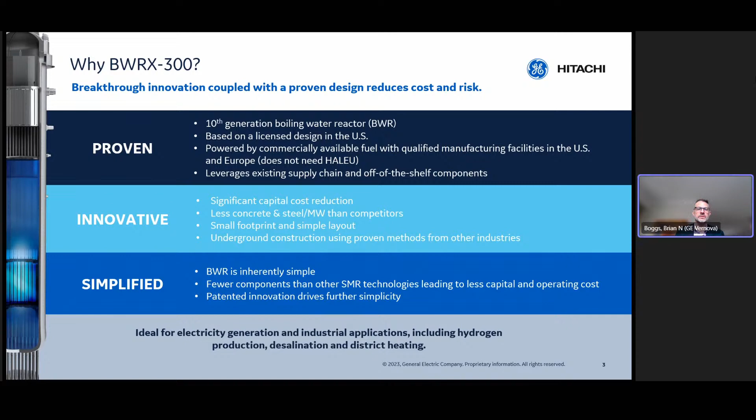Kind of touched on this before, but why GE or why GE-Hitachi? Like I said, we've been at this for quite a while. We've been at this over 60 years in the nuclear space. In fact, we had the first reactor that was commercially owned. That was in Canada.

I'll touch on our activities in Canada in just a second, but I'm sure most people in the audience are aware we're going to be deploying the BWRX-300 in Canada with Ontario Power Generation. So we like to say we're coming full circle with the first reactor happening in Canada back in the 60s, and now we're looking at deploying in the late 2020s our first reactor at the Darlington site.

I'd already mentioned that we have 67 reactors licensed in 10 countries. There's still dozens in operation. I think it's about 23, 24 in the US alone. So when you think about a company that has not only the technology that's evolved over time and is on its 10th generation, you also have a company that has decades of experience servicing reactors.

So I think that puts us in a unique position for a lot of folks that are looking to deploy, where we fully understand how to take a reactor apart, how to refuel the reactor, how to do inspections, how to do a lot of the modifications that may need to happen over time, and then also get the reactor back online as quickly as possible, which is one of the most important things, because the less time you're down, the more you're able to generate steam to produce electricity or some of these downstream products. We also mentioned the bundles of fuel.

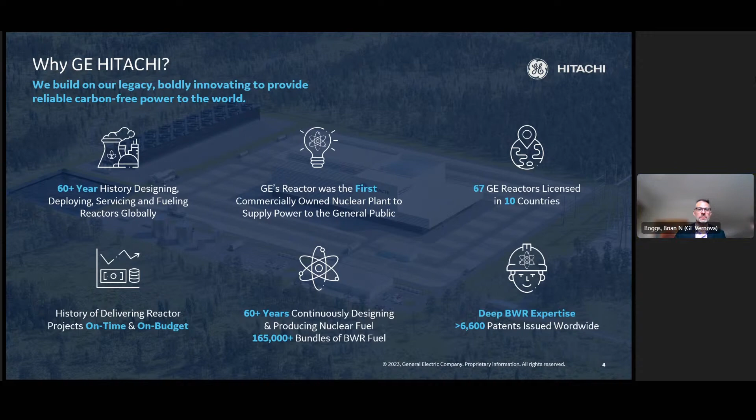So it's pretty exciting. Before the end of this decade, we do expect one, if not more, to be online, operating, generating safe, clean, reliable electricity to the grid in Canada, which should set us up, as well as the industry, very nicely for more SMRs to come online. And as confidence builds, we expect this to scale accordingly.

So as for some of the activities in Canada, OPG's already submitted their construction license application. So we're already actively working with the CNSC in Canada through OPG to get this license approved so that they can move forward with the large scale construction.

Also in Canada, we've been selected by SaskPower. I was actually there yesterday with the SaskPower team. That's one of the reasons I couldn't be with you today. And they're looking at potential deployment in Saskatchewan as well. With a lot of the coal retirements and the aggressive carbon goals that Canada has, they're looking to use the BWRX-300 to meet some of those goals.

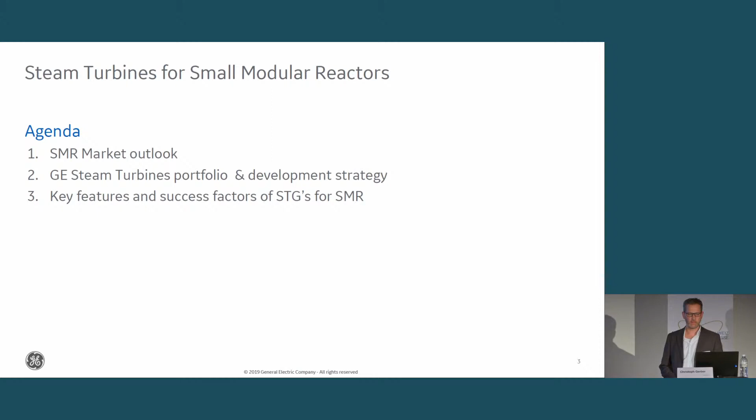And the third element, obviously, is the decarbonization strategy and what that means for the SMR specifically in the short term as part of the SMR strategy 2030-40. We expect that SMRs will replace some of the decommissioned fossil fuels. That's also why the size of the BWRX-300 is chosen in the 300 megawatt range, because a majority of the fossil fuel plants that are decommissioned are in that power output range.

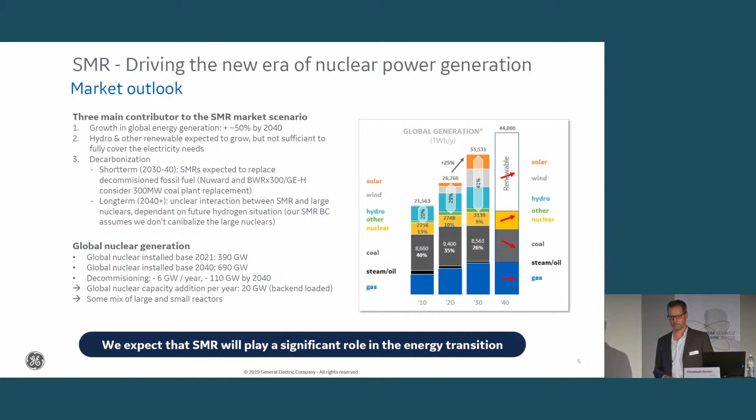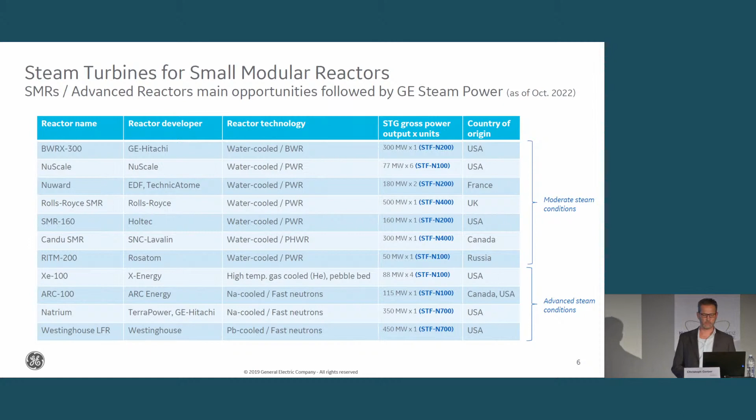So if we look at the N100, the smallest solutions, that's a range for 50 up to 130 megawatt. A typical example is NuScale. I think most of you have heard of these activities. It's a single shaft turbine which provides power output in the order of 70 megawatt. The N200 frame covers a range between 100 and 350 megawatt. It can be configured with 1 LP or 2 LPs, depending on the size and the volume flow in the end that needs to be covered.

An example for the smaller size would be the Nuward opportunity, which is being developed by EDF, and on the bigger end of that range would be the BWRX 300, in the order of 300 plus megawatt power output, which considers 2 LPs at the end of the HP turbine. STF N400, a range between 250 and 500 megawatt. An example here would be the Rolls-Royce solution. And then at the end of the range, for instance, the Westinghouse application, which is the N700 frame, an application for advanced steam conditions, which will come even later than the conventional steam conditioned reactors.

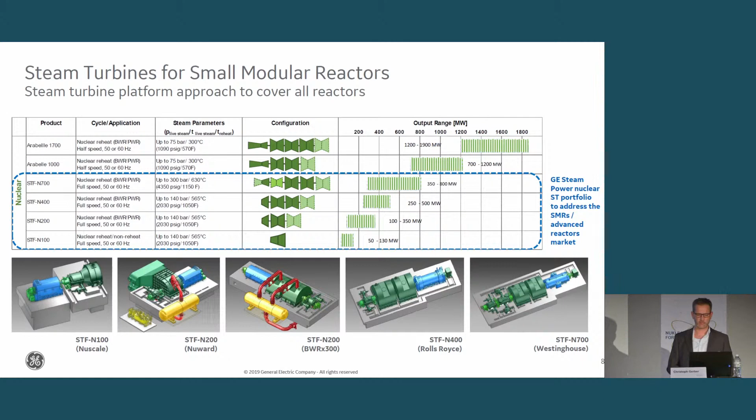Some key factors that we believe are critical for the success of the SMR journey. Cost, obviously, is one of the key elements. We are designing our solution for cost. We are optimizing our turbine and the generator specifically to reduce cost as much as possible, looking at all the aspects, at the design, at the configuration, at the material. At the same time, we also improve performance as much as possible. So we need to find the right balance to drive down cost, but also have a high-performing steam turbine. And because we talk nuclear, obviously we need to make sure that the design is resistant against wetness.

We are also looking at the sourcing and supply chain, again, to reduce costs, but also to improve lead time, which is a key element of the SMRs compared to the large nukes, as we know. And we want to develop a standard product portfolio which again helps to reduce costs and improve lead time, and this standardization should really cover the complete target range between 50 and 500 megawatt.

Modularization, as per the name, we are looking into that, trying to assess how this impacts for our scope lead time and transportation costs. It will improve quality because we have a bigger scope of assembly in-house in our workshops. And it would also give an advantage in the accuracy of the planning, the schedule, and the costing, because of less uncertainty during site erection. And last but not least, we are also trying to optimize our execution process, for minimizing execution time and also execution cost in the end.

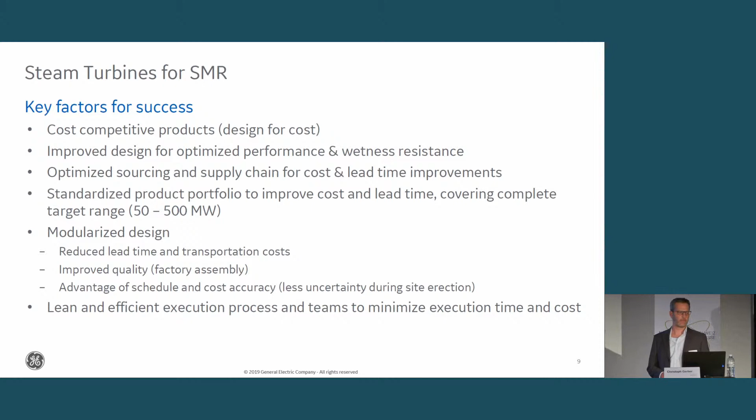And obviously, depending on the site, there will be different cooling conditions, which has an impact on the detailed steam path design. But all this should not change the footprint, the outer shape of our solution. So from outside, you will not see a difference. But we can accommodate those changes by optimizing the steam path, mainly by exchanging, for instance, the rear stages, the last stage blades in the LPs, to have optimized operation and proper coverage of the related back pressure condition.

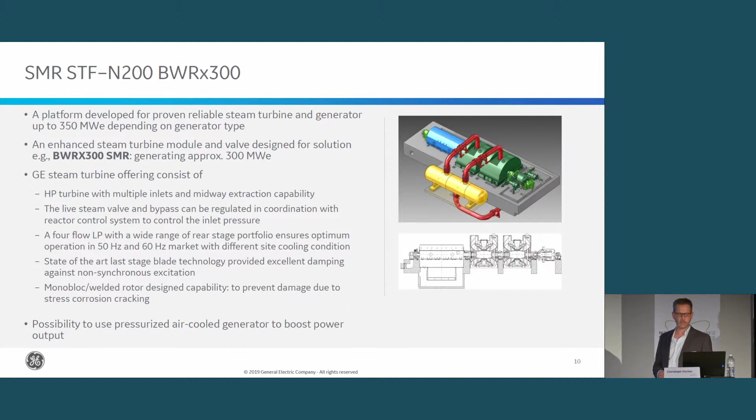Again, to go a bit into the key features, modularization and compactness is a key aspect in our view because of the advantages we see in terms of transportation costs, shorter erection time, less site labor cost, and reduced quality risks. And all this is mainly driven by the pre-assembly we can consider in our own factories.

As mentioned, rotor and bearing design: we have a single bearing concept between turbines and the generators, helping to reduce again the footprint, which is a key factor, and also improving the installation and alignment requirements. And as mentioned before, the welded rotor helps to select the materials ideally and improves inspection and resistance against SCC.

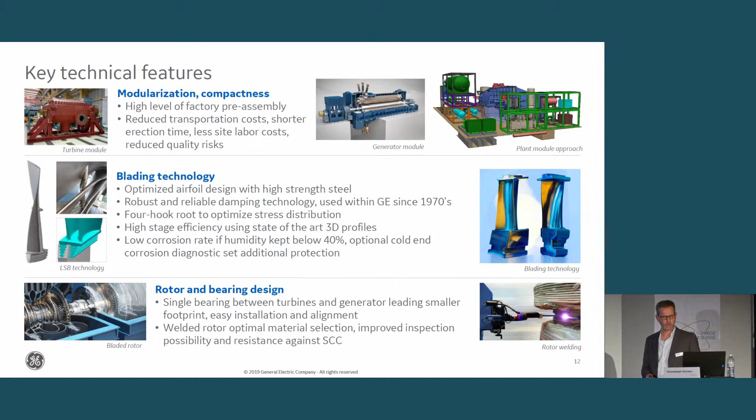Inspection intervals apply here for 100,000 equivalent operating hours, which is also a key element. And we have a lot of references for those designs. So it's proven technology, proven design features, which is important specifically in the nuclear field of application.